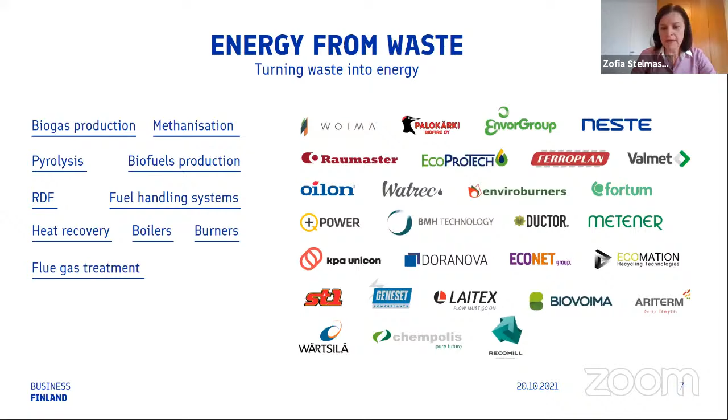There are heat recovery, boilers and burners solutions, quite a holistic approach to these. We will hear from companies like Valmet, Woima, and Sumitomo Foster Wheeler today a little bit more. And then some waste management design and consulting services, and waste efficiency in industrial process services. Please study more and approach us with questions if this is of interest.

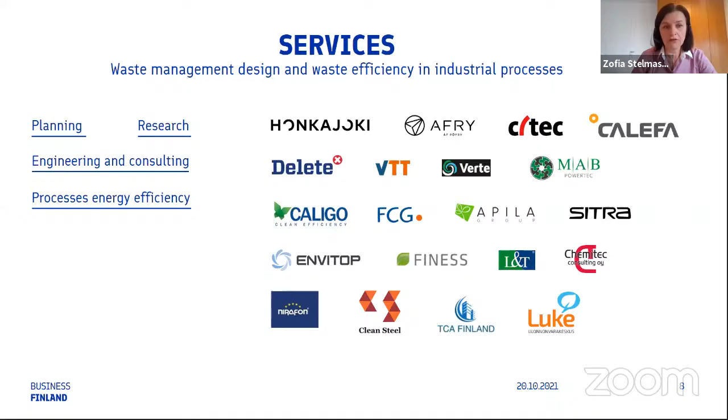Now I would like to move to some best practices and cases from Finland. I have selected 3 for you to bring forward. The first one is ECO3 - and what is ECO3? ECO3 is an industrial eco park.

This is an area of about 120 hectares near the city of Nokia and Tampere. What they aim at, their goal, is to actually turn all the waste into circular economy - so waste is no longer waste, it is raw material for somebody else. And then landfills in that landscape are no longer needed. This is a kind of competence center for demonstration and piloting. They started about 3 years ago, and this still continues, so new companies are coming and testing their solutions there.

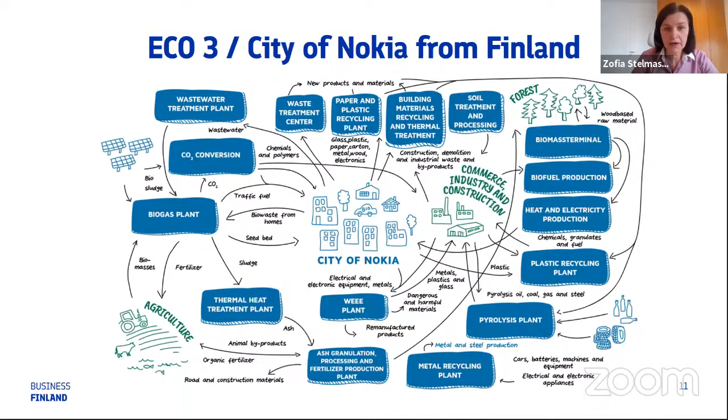My next example is about Vantaa and its waste-to-energy as an element in decarbonization. Basically, Vantaa Energy is an electricity and heat producing company in the city of Vantaa. They have an ambitious target of going carbon neutral by 2030.

What they need to do in order to reach this is, first of all, phase out coal, and this will happen already next year. One of the enablers for this is the completion and expansion of its innovative waste-to-energy plant.

Last year, they actually started to develop the concept with the company Wärtsilä about how to produce synthetic methane there, and then how it could be further used.

They intend to use green electricity to produce hydrogen through electrolysis. Then they intend to extract CO2 from the emissions of the existing waste-to-energy plant, and out of this produce synthetic methane.

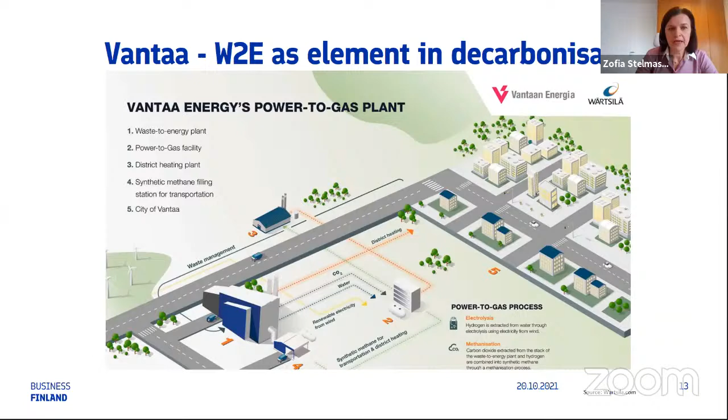I'm running out of time, so very shortly, the Lahti case. Lahti is a city in Finland, about 2 hours' drive from Helsinki. In 2021, it was the European Green Capital, and they have plenty of very interesting climate-positive initiatives.

What I would like to bring here is waste management again, and how this is part of the puzzle. If you look at the picture on the left-hand side, in 2007 they used to landfill about 55% of the waste collected. Now in 2021, they are landfilling about 1%, and all the rest is either recycled as material or utilized for energy purposes.

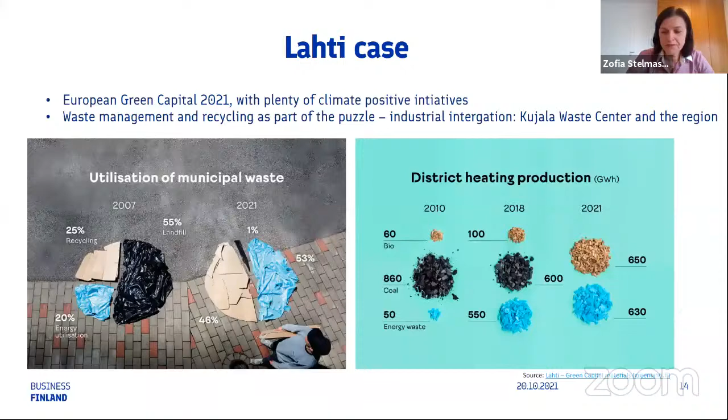This is a tremendous path forward. How was it possible? It is because they were stubborn and went step by step through different developments. For example, they started separate bio-waste collection in 1995. In 1998, they started extensive separation at the source with five waste types.

Then in 2005, composting was brought into being. Then in 2014, biogas, and so on and so forth. Really impressive.

Now, if you would be interested to hear more about these cases, I would like to encourage you to approach us, to approach our colleagues in Turkey, the excellent Turkish teams in Business Finland. And with these words, inviting you to cooperation, I would like to end my presentation. Thank you very much for your attention.

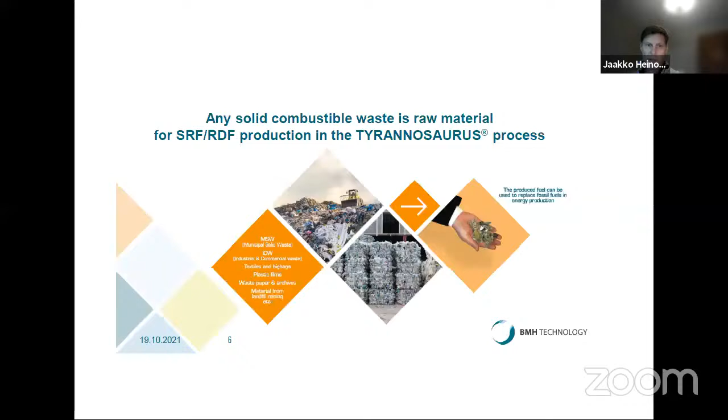I'm telling a little bit about the waste refining solution. Next, please. This is the main idea. There is a lot of waste around the world, in the landfills and everywhere, and we can make very good quality fuel from that waste. And with this fuel, it's possible to replace fossil fuels in energy production. Next, please.

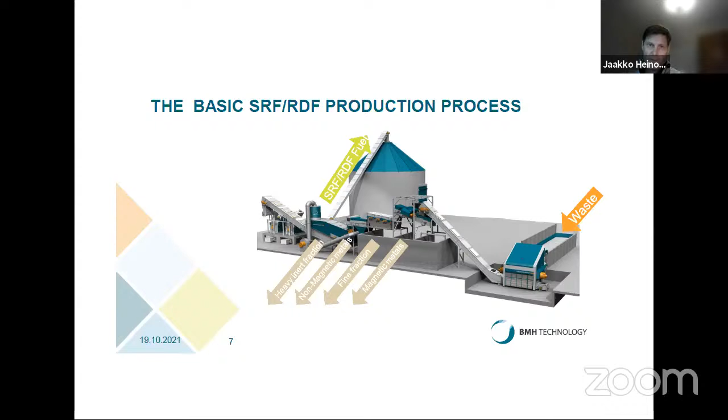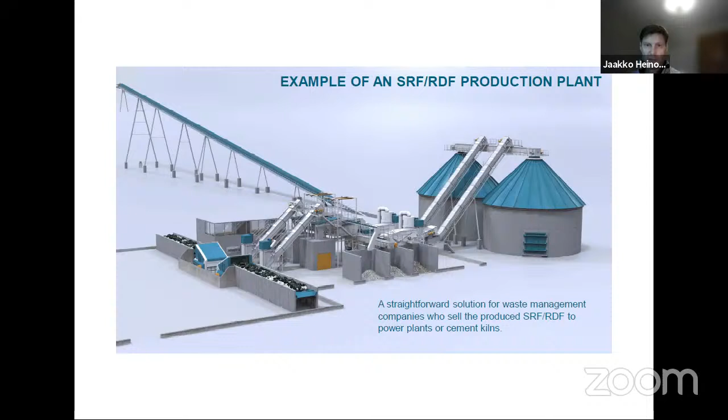Next, please. And then about the solid biofuel handling solutions. Next, please. This is a typical layout from solid fuel handling process. In the beginning, there is a fuel receiving station, and then we have screening station and storage, which can be A-frame storage or silo type of storage. And from this storage, we can feed straight fuel to the boiler.

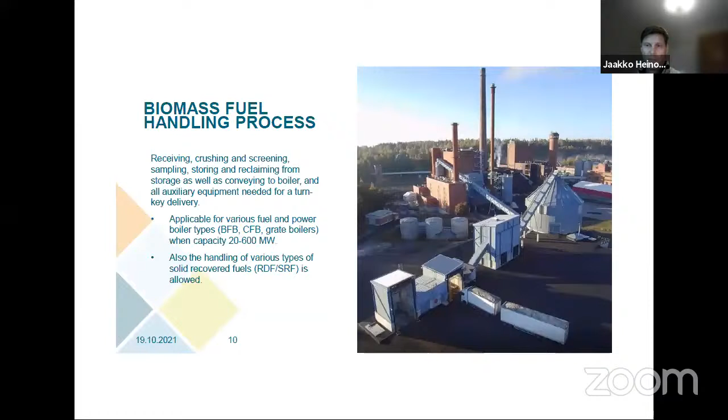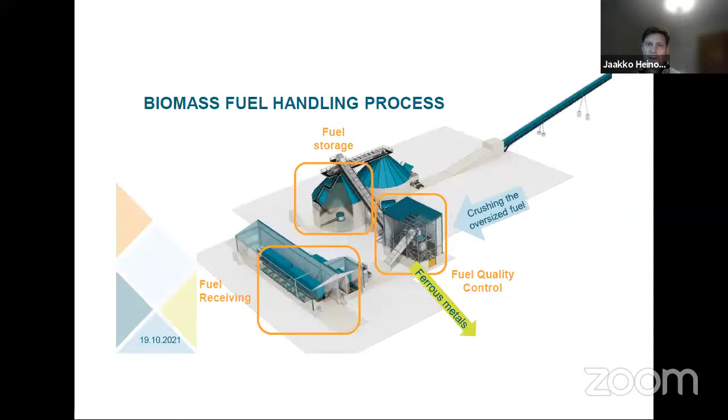Next, please. This is another picture also from the same thing. So in the beginning, we have fuel receiving, and then we have fuel quality control, where we can take out ferrous metals and crushing the oversized particles. And finally, we have fuel storages and feeding to the boiler and or cement plant. Next, please.

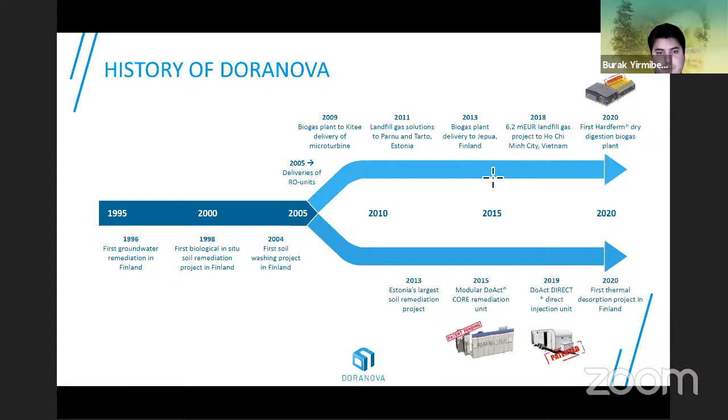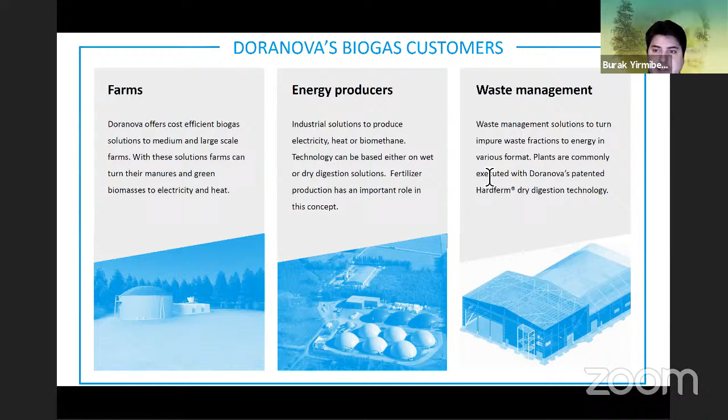So, as most of you might know, biogas has three main customers. Number one is farms, second is energy producers, and the third one is waste management. And this is the one I would like to focus on, because waste management is the primary goal of biogas production. It is not the energy, but mostly the waste management solution. And Doranova patented a new solution for cases where the current solutions cannot produce results. So we have three different plant concepts.

The first one is Wetferm, which is more like a classical approach, that is wet anaerobic reactors, where the substrates, the waste, is in mixable form, which has lower solid ratio. Then we have the Solidferm, where it has up to 25% dry matter, a little bit more challenging, that needs a different approach. And then in the last part, we have the Hardferm, which is our patented solution, where the waste has so much solid matter and impurities, large particle size, that it is not possible to process with the classical methods.

And this is especially designed for organic fraction of the municipal solid waste, which is a big case in Turkey, where the waste separation is not done at the source, in the homes, but it's done in plants where one single truck brings all the waste to the same location and it is separated by hand or by automatic solutions. But the separation for the organic fraction is generally not enough to process them in regular biogas plants.

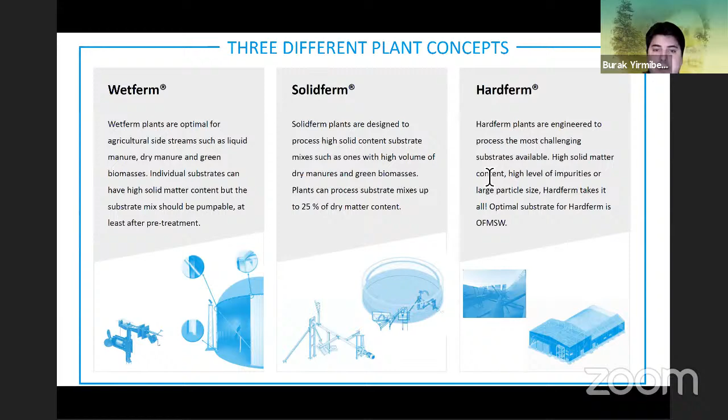So for Wetferm and Solidferm, I will not go into detail. These are pretty classical solutions, but I would like to mention one thing, that in Finland and the rest of the world, one developing trend for biogas production is not electricity production. It's actually being fuel. So what we do is we purify the biomethane up to 99% purification, which can be used as fuel, or it can be pumped into the existing natural gas systems.

And that's why in Finland, if you look around the municipalities, a lot of municipalities are using biogas as their bus and truck fuel. And also there are applications where they are mixing it with ship fuels, the natural gas fuels in the ships, to have renewable methane in the system.

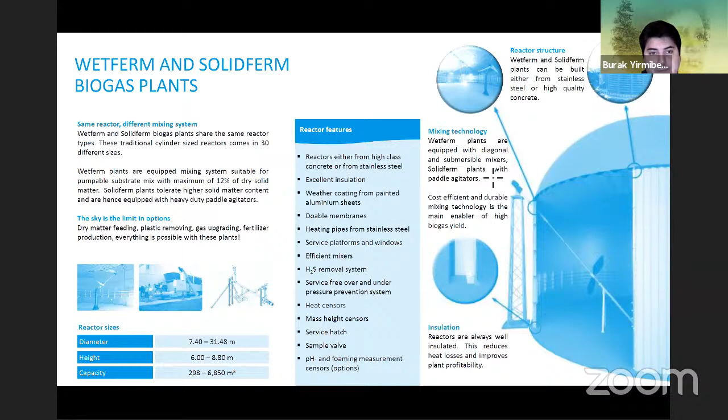And when it comes to Hardferm, we developed this most efficient organic fraction of municipal solid waste for biogas production. And this is a completely scalable concept. It can be as low as 10,000 tons per year to 160,000 tons per year, depending on your needs. And it has been engineered to focus on stability and mechanical durability.

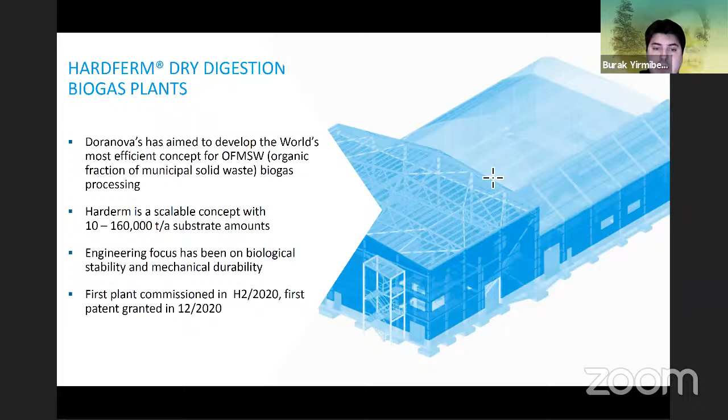The problem that the other solutions have is, after a while, the process stops because of either biological instability due to impurities or problems with the mechanical mixing. And we have our first plant that started operations last year, and we got our patent granted in December last year. And we have other Hardferm plants in production right now.

So when should we use Hardferm? It is when you have high dry content, when the liquid amount is very low, and you have a lot of impurities. It can be sand, rocks, or plastics, or whatever that's not biomatter in the system.

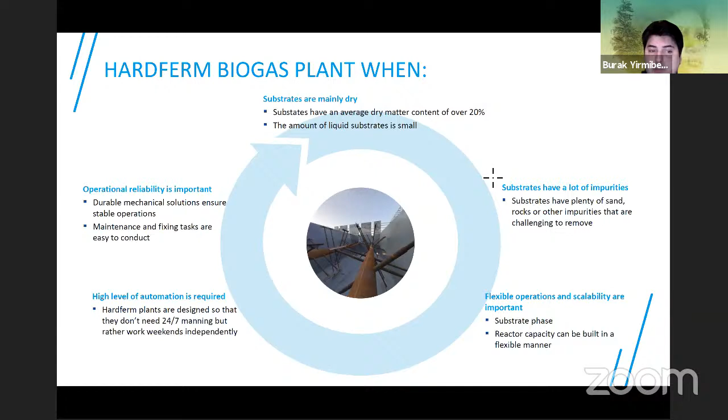And it is very flexible, and reactor capacity can be built in a flexible scale. So today you might need 30,000 tons per year, and in 5 years you can increase it to 100,000 tons without a problem. And we try to make it as automated as possible. And our solution ensures stable operations, and maintenance and fixing tasks are easily conducted.

And in here you can see the concept of the Hardferm. And if you know a little bit about biogas plants, you might consider this a very unique way of mixing. And the way we do it is we heat the walls, floor, and also the circulation shaft. So the heat efficiency is covered in all ways, and the mixing is completely optimal and optimized to deal with this kind of challenging task.

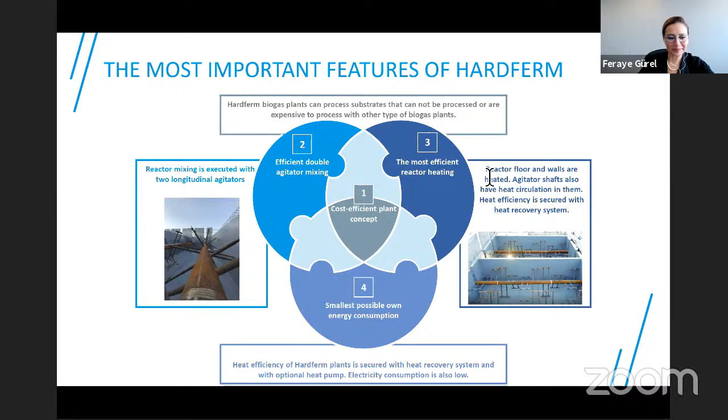Last 2 minutes. Yeah, and as a last point, what I want to mention is this is a very important concept for Turkey, where we don't have, unfortunately, source separation. And the organic fraction of our waste is generally going to incineration, which is less than 10% efficient compared to biogas production.

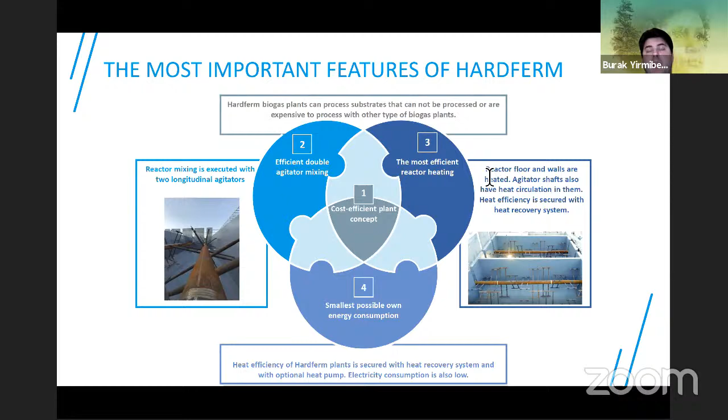So this is going to be the future, and in the future, what we are expecting is biogas production will offer a way to capture CO2 from the atmosphere and, together with hydrogen, convert it to methane. This has already been discussed, so I will not go into detail.

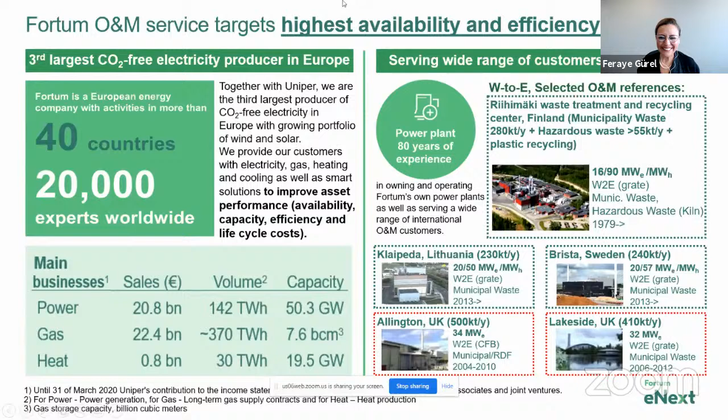Are you with us? Okay. Yes. Okay. I'm with you, and I can see myself on your screen. Okay, that's very nice. So it's good that I look slim. I'm happy to see myself. Screen is yours, Mr. Holappa. I can't really say is it any better now, but let's say, is it any different now? So now, hopefully you can see the slide. We can see it. Okay.

So anyhow, good morning to everybody. My name is Jyrki Holappa, and I'm from Fortum, and I'm representing specifically a business unit in Fortum which is providing services and solutions both to our internal business units and divisions, but then also to companies external to Fortum.

So basically, I'm now focusing on operation and maintenance service, as our agenda today is quite much on the waste to energy side, and here highlighting what we typically focus on in O&M: highest availability and efficiency to owners, irrespective of whether we are talking about Fortum or other owners of the power plants.

On the left-hand side of this very busy slide, I'm describing Fortum in general, because it's very important to understand that our solutions and services are always based on our own assets and experiences, and basically we are not offering anything to anybody unless we have tested and proved it ourselves with our own fleet.

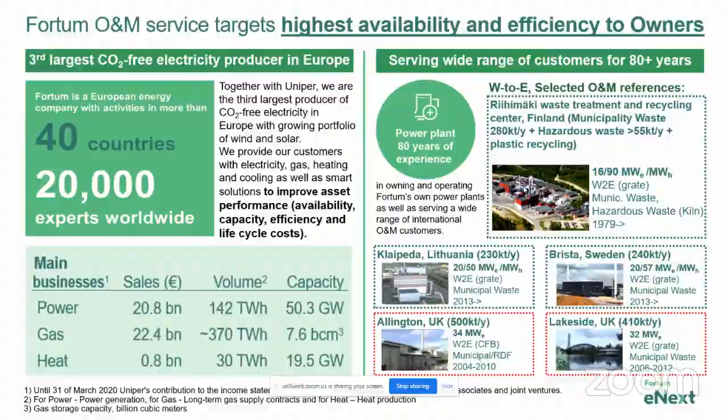That's about the generic part, and the only thing I still have planned to go through with you today is the operation and maintenance of waste-to-energy type plants. The first thing is always, of course, to understand what kind of technology, what kind of plant we are talking about. And with waste-to-energy plants, we all know that there are many challenges. Technically, we are talking about a challenging fuel type of power plant, and it really differs from case to case where the biggest importance lies regarding operations.

Typically, waste-to-energy plants have, of course, high priority to deal with the waste, so it's a waste management topic, but electricity production and the efficiency of making electricity out of the waste is sometimes very, very important too. It really varies from case to case, but it's very important that this is properly understood when operating and maintaining the plant.

Then again regarding O&M, when there are many stakeholders involved in this kind of project, it's very important to understand how the risks are diversified among different stakeholders in the project so that it really is functional, makes sense, and is properly balanced. Otherwise, it tends to lead to problems if that's not done properly.

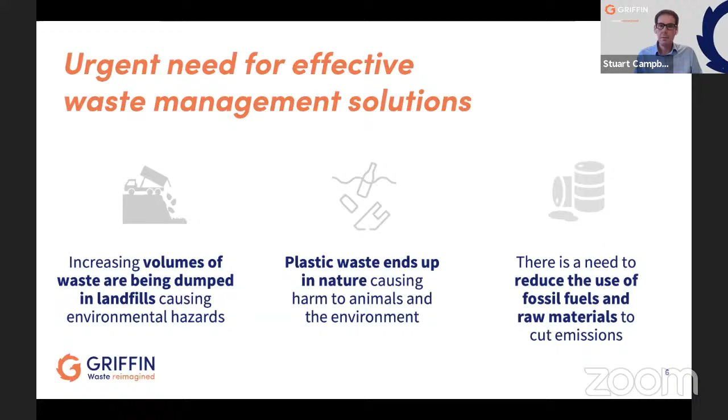We all know about this, the need for effective waste management solutions, and exactly the reason that we're all on the presentation today. We really need to drive forward in reducing landfill, reducing plastic waste and reducing fossil fuel usage. And that's what Griffin solutions are all about.

The Griffin way of thinking: we're a project developer. I'll talk about the projects that we're developing there. We also invest in projects where necessary, and we operate plants as well. We're operating the RDF plant out there in the United Arab Emirates. We work with equipment suppliers to supply best-in-class equipment, and we've got our finger on the pulse in terms of the materials and the trading of those materials.

So the 3 business units, I'll just very briefly explain what we do there now. So fuel from waste, focused on refuse-derived fuel particularly. We've got our first plant operational. That went operational 12 months ago in the United Arab Emirates. It's a build, own, operate, transfer project with the government of the UAE and Ministry of Climate Change and Environment.

We've got local partners there, so Griffin is one of 3 partners in the projects. Investment size of 33 million euros, and it's the first refuse-derived fuel plant operating in the Gulf region. And really, that's dealing with over 1,000 tons of municipal solid waste a day, and creating an RDF fuel.

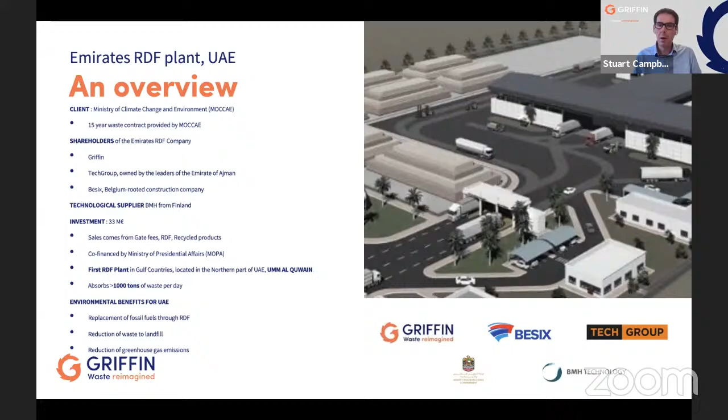Plastics recycling, the second part of our business. We run the Business Finland ecosystem around plastic waste refining. So we're bringing together over 30 companies, and that ecosystem is growing, and we're trying to develop co-learning and co-opportunities for project development.

And then we've also just launched a joint venture in Finland around extended producer responsibility. So you probably know about this. This is EU legislation that's driving up the waste directives, driving up the requirement for recycling targets. So along with a joint venture partner there, Reclay Group from Germany, we've launched an extended producer responsibility company that will be really taking care of recycling as we go forward in Finland.

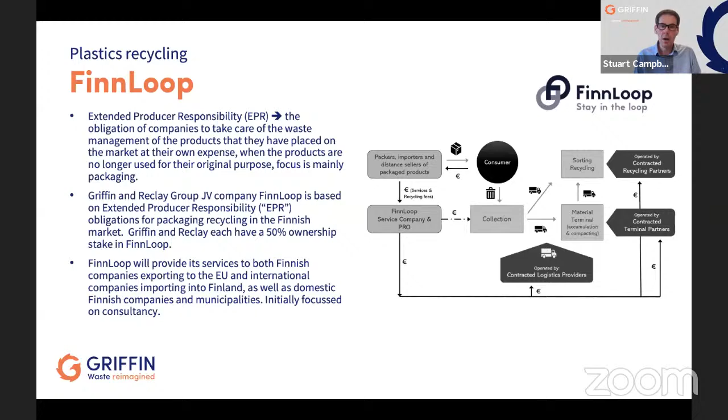We're providing consultancy services about improving packaging design, and taking care of packaging recycling, particularly around plastics as we go forward. And the next stage for that, we'll be launching a producer responsibility organisation. That could be very useful intelligence and knowledge that we've got in this sector that we could apply to the Turkish market as well.

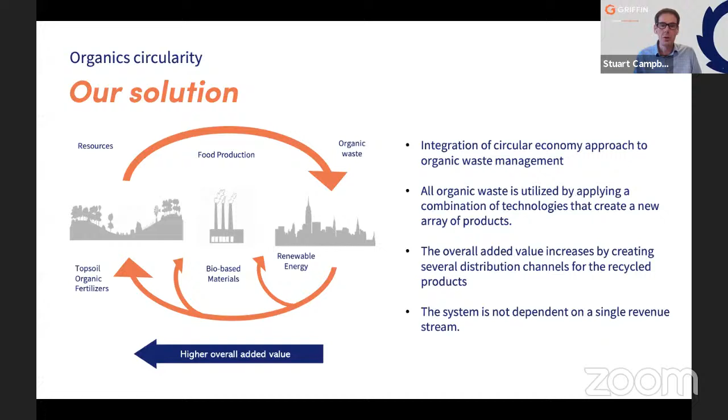And then the final part of our business is around organic circularity. So that's composting, particularly. It's all around making sure we capture the benefits of green waste and organic waste. And we've got our own technology here. It's a high efficiency, high speed composting drum that can basically circulate the goodness of that material back into the agricultural sector, as explained on this slide that you can all see.

We're deploying our first, thank you. We're deploying our first units here initially in the Italian markets and the Spanish markets. And again, I'm sure this will be very applicable to Turkey, but it's basically composting that material so it meets the high levels of EU standards and producing a high quality organic compost.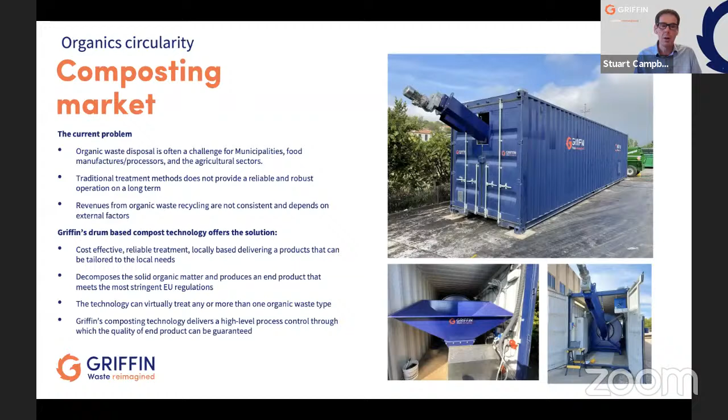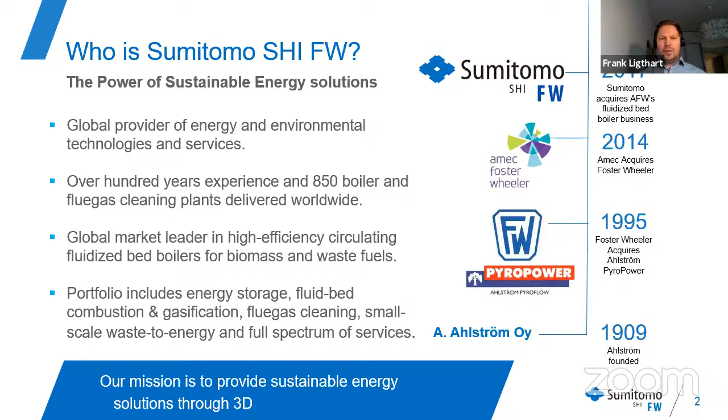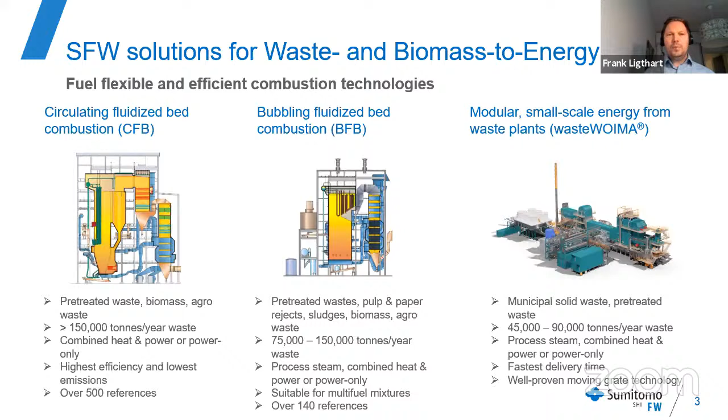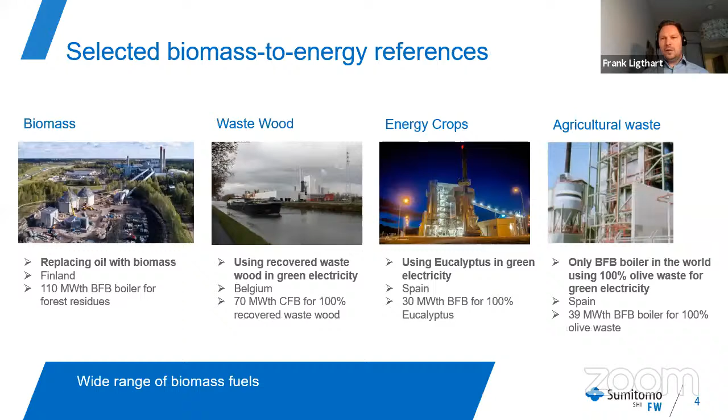Just to give you a flavor of where SFW boilers are utilized, 4 selected biomass to energy references. I will not go through them in detail, but on the left, you see a typical biomass application, a BFB boiler for using forestry residues in Finland. Then going to the right, a CFB boiler in Belgium, utilizing recovered waste wood in green electricity production. The next one is an example of using energy crops in electricity production using an SFW BFB designed for 100% eucalyptus wood chips. And as a last example, a unit in Spain, designed for 100% olive waste for green electricity production. So clearly the SFW boiler value proposition is suitable for a very wide range of biomass fuels.

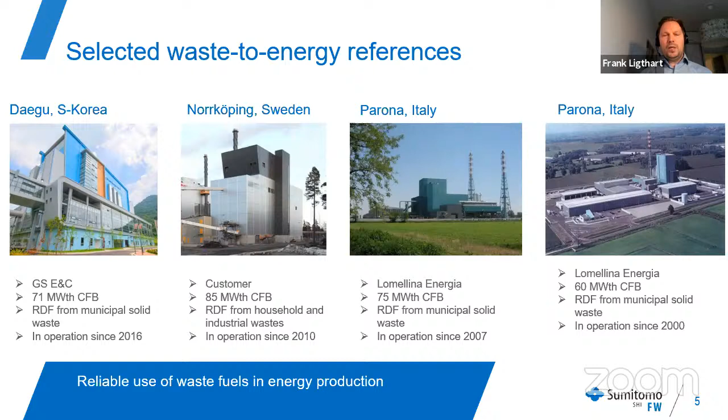Similarly, a few selected examples of waste to energy plants built by SFW. The 4 plants I've selected here are all based on our circulating fluidized bed combustion technology for very high efficiency conversion of waste into energy. All these plants are utilizing a fuel which is derived from waste, what we call a refuse derived fuel, a pre-treated waste for energy production.

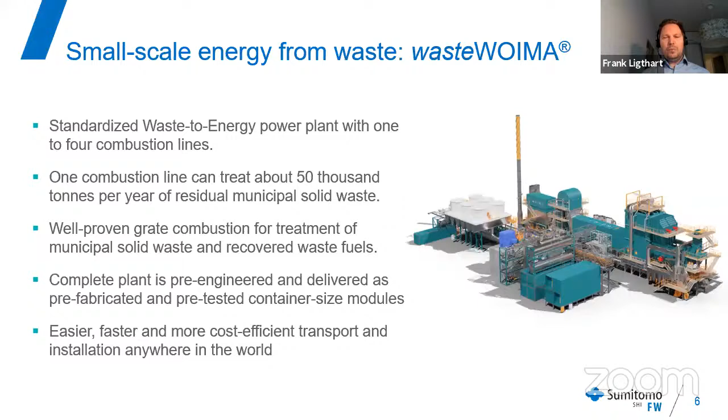Good morning, everyone. My name is Ari Kokko and I'm coming from Valmet Energy Business Unit. I'm heading the technology and R&D here. Today I'm presenting Valmet's high efficiency waste to energy solutions.

A couple of words about Valmet first. We are a technology provider, but of course equipment supplier as well, in the pulp, paper and energy business segments. We are a global company having headquarters in Espoo. Size-wise, we have 14,000 employees and we are roughly a 3.5 billion company. We also, like we have heard today, have a long history as a technology company, more than 200 years.

Talking about waste to energy, we are never talking about waste incineration. We are always talking about waste to energy or waste to power. So we are following this circular economy principle, meaning that all the materials which can be recycled are recycled and not put into the boiler.

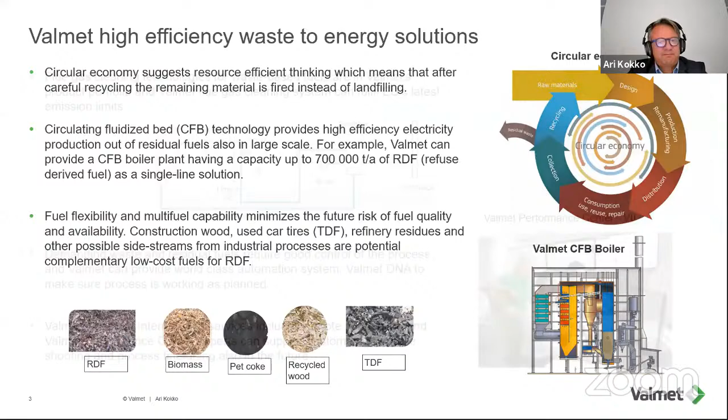Then, Valmet's waste-to-energy package also includes a full flue gas cleaning system. We have in-house equipment for flue gas cleaning, and those are Valmet's own design and Valmet's own delivery. We can fulfill all the flue gas emission limits anywhere in the globe.

Everybody knows that waste is quite a demanding fuel. It's very heterogeneous, so the quality is changing. So controlling the system is very important.

Luckily, Valmet has its own automation system, Valmet DNA. So we have very sophisticated controls to provide, and we want that to be part of our package.

The last element, built on this Valmet DNA automation system, is the Valmet Industrial Internet. Because the system has remote connections, we can provide the connection to our Valmet Performance Center for our customers, not only for startup purposes, but also later on to fine-tune the system or do some troubleshooting.

This has been very valuable during this COVID time when traveling has not been too easy. We have managed to start up boilers and also solve some customer challenges.

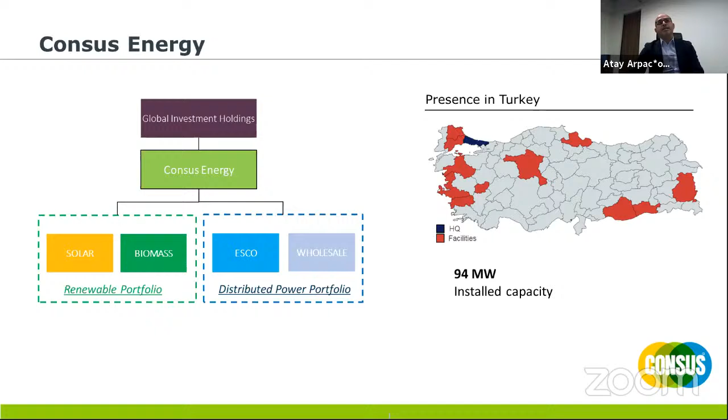In distributed power, we own the largest ESCO energy service company in Turkey, providing build and operate cogeneration and trigeneration facilities for end consumers. Our total installed capacity under management is around 94 megawatts. And our operations are distributed throughout the country, from west to east, from north to south. I will leave you with some pictures of our facilities while I speak in more detail about our operations.

We're using conventional moving grate boiler technology with a steam turbine. So probably everybody knows about that. But I think our differentiating factor is that we focused on using mostly local equipment, supporting local manufacturers where we could do that. I think one other differentiating factor is that we collect a substantial portion of our biomass with our own equipment and with our own personnel.

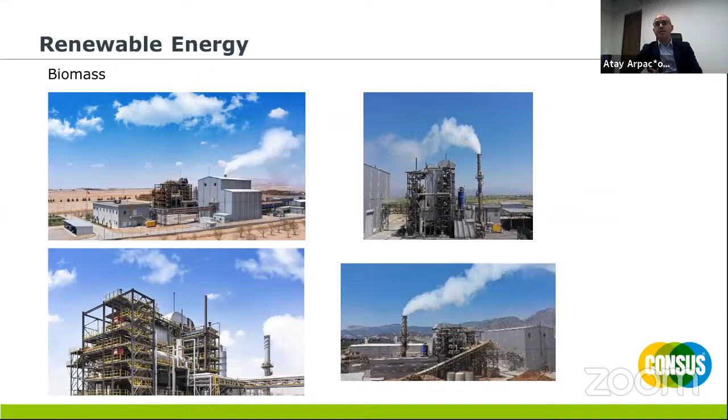I think we have the largest agricultural equipment fleet in Turkey, or if not one of the largest, including combines, rakes, balers, and all kinds of equipment that is required to collect these stalks from the farmers' areas. And of course, the biggest challenge about biomass is seasonality. The harvest season is 60 days, 90 days tops, and you have to collect a year's supply within that limited time frame. So it creates a big bottleneck. So you have to plan very carefully.

So we are using our own equipment and our personnel, in addition to a comprehensive procurement and supply using our solution partners and suppliers. We have agreements with private farms, state institutions, including the Forestry Directorate, the Agricultural Directorate of Turkey, in order to create a long-term supply security for our plants.

Of course, biomass is still a niche sector in Turkey, but a developing sector. I think one of the most important things is that besides the environmental and economic values, the employment, we have to talk about it. Per megawatt installed capacity, biomass has the highest employment rates. Also considering the employment that it creates on the supply side, it's significant, and it creates significant support also regionally.

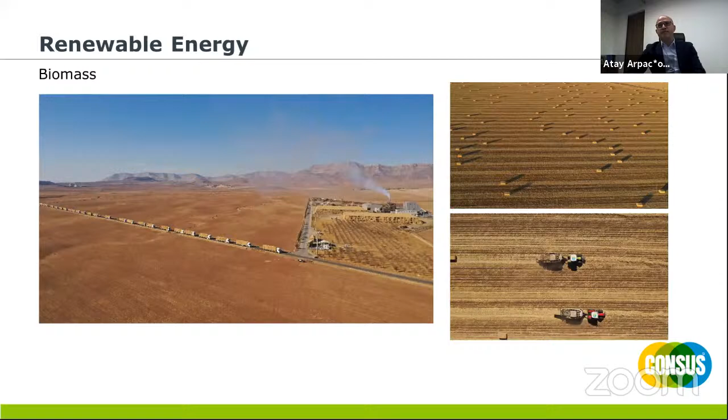I think the integrated approach to collect, to handle, and to operate the plants is required in the biomass sector. I think that was our strategy while entering this sector, and I think we have managed to create a supply chain that will create long-term visibility for our operations.

Last but not least, I also want to mention our distributed power portfolio, because we have the largest energy service company in our portfolio with 54 megawatts in 8 locations. We are building and operating cogeneration facilities and trigeneration facilities for our end consumers, providing their electricity, heat, and cooling. But we are also reviewing some opportunities where this ESCO plan strategy can be applied using the waste.

A lot of manufacturers, a lot of factories produce waste, and somehow try to dispose of that waste. If a build and operate model can be applied using waste to energy technologies in these factories, I think there can be significant potential for Turkey, aside from the IPPs, I mean independent power producers, so that the factories can produce their own electricity and heat for their manufacturing purposes. This can be a significant opportunity for Turkey as well.

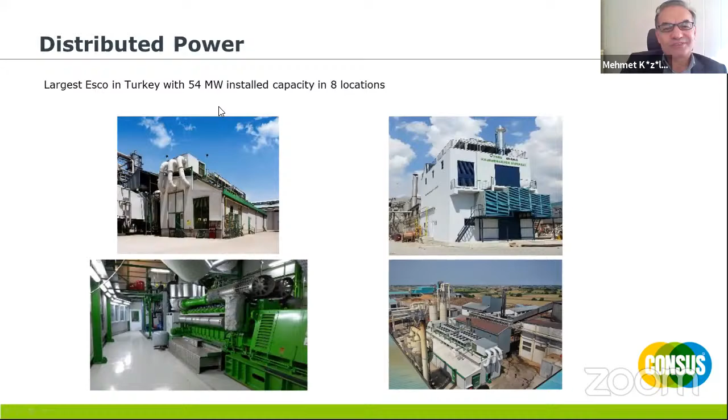I am representing Çimentaş Trakya cement plant, which is located in Edirne, Turkey. Çimentaş is a subsidiary of Cementir Group, which is an Italian group. The plant capacity is 2 million tons of cement per year. I want to give these rough figures to understand the capacity. The cement industry, as you all know, is an energy intensive sector. So what does energy intensive mean?

I can give you roughly the variable cost structure. 85% of the variable cost consists of energy. Only about 15% consists of raw materials. Of that 85%, roughly 50% is heat energy, and about 35% is electrical energy. So we are concentrated on the heat energy. As of today, 55% of the heat energy is replaced by alternative fuel.

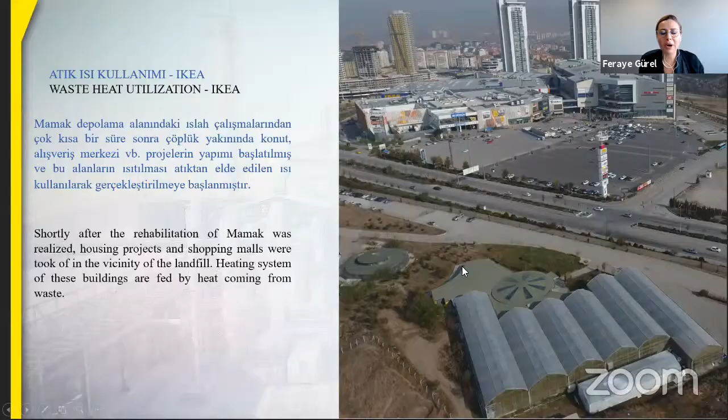Morning, everyone. Again, I'm Ozan Öztürker. I'm the R&D Director of ITC. ITC is the waste management company, I think the first company doing this business in a professional and modern way in Turkey. For more than 20 years we have been doing this business in Turkey. At the moment we are operating 14 plants in 11 different cities with 1,400 employees.

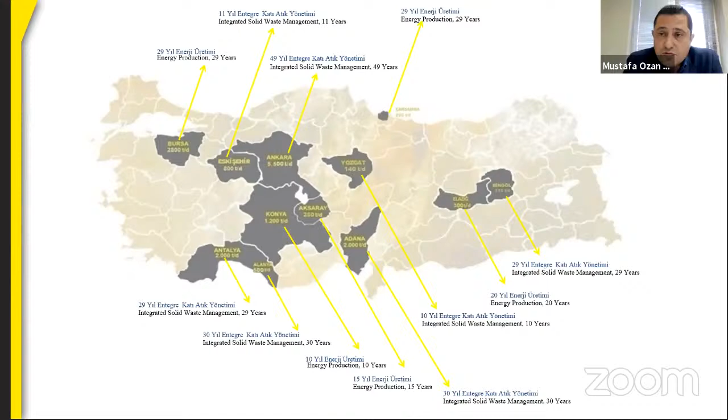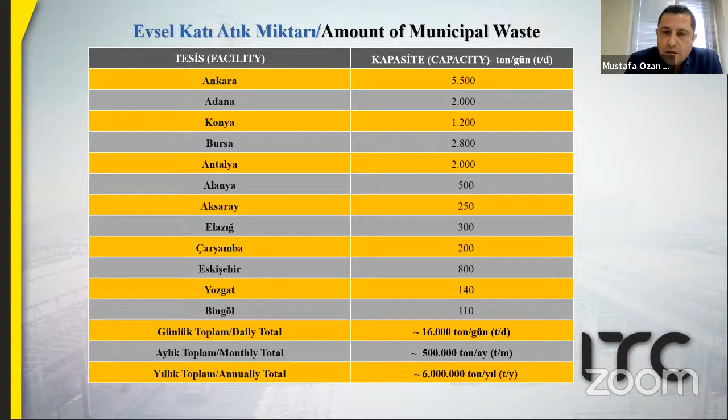Approximately, I can say that we treat every day 30% of the whole of Turkey's household waste. And you can see the capacity of our plants. Unfortunately, in Turkey, household waste is not source separated. So we have to deal with a very challenging and difficult waste here, and we have to adapt and find proper solutions for such a waste. At the end of the day, we can now generate electricity, we can do recycling, we can do RDF production and also waste heat management.

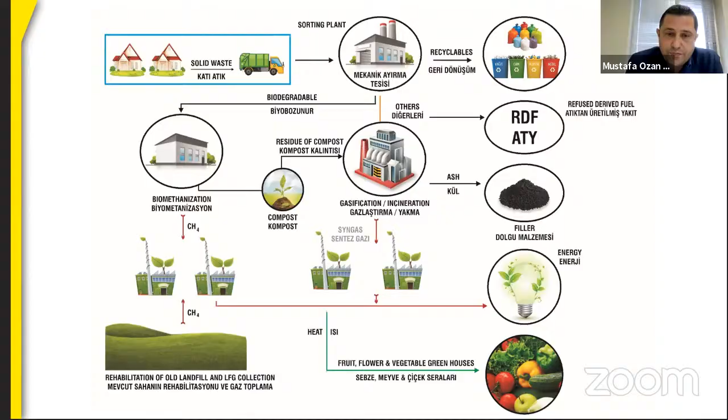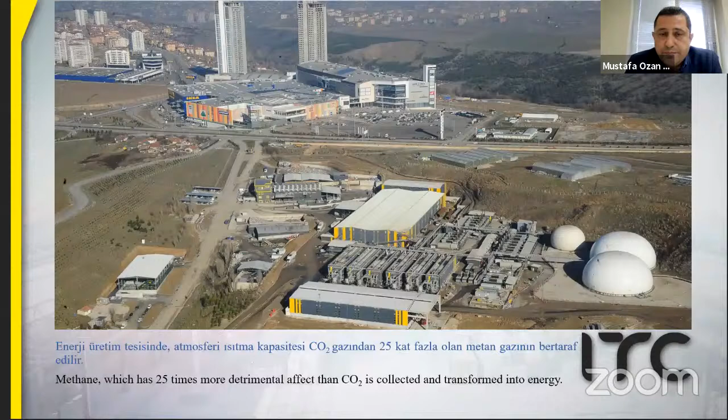But first of all, our first priority is the rehabilitation of the landfill, because in each project, at first we have something like a wild landfill. This photo is from Mamak, our first project, in the capital city of Ankara, and it turned out to be such a plant at the end of the day. This is the landfill site of Mamak, and we are now surrounded by shopping malls and residential buildings. This is another view of Mamak, and this is Adana city. It's the same story here also.

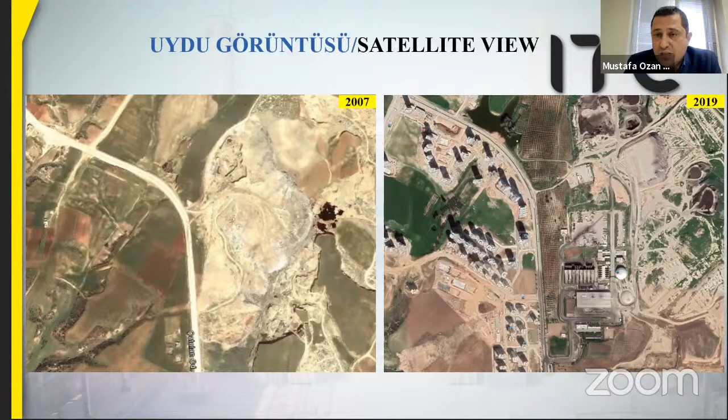This is how it started and it turned out to be such a plant at the end of the day. This is the satellite view. During the startup phase, there was nothing but landfill. Now it's a residential area. As I mentioned, we have 14 plants. We consider 6 of them as integrated solid waste plants, meaning in these 6 plants we have sorting units and biomethanization. Our digesters are concrete, plug flow digesters. We call it biomethanization and landfill operation.

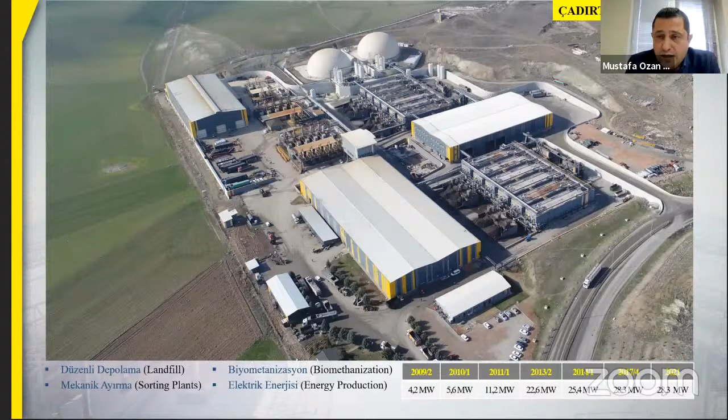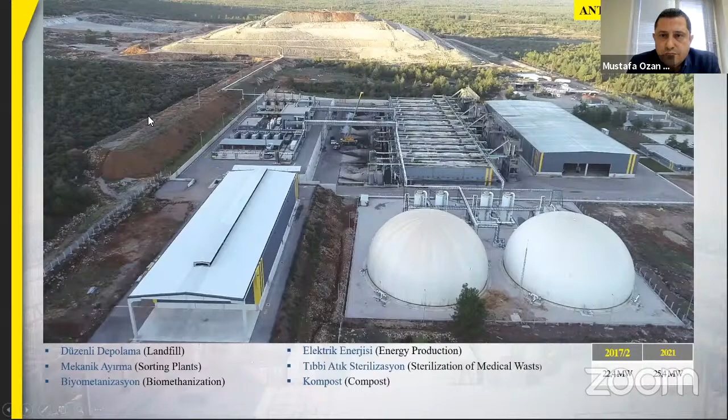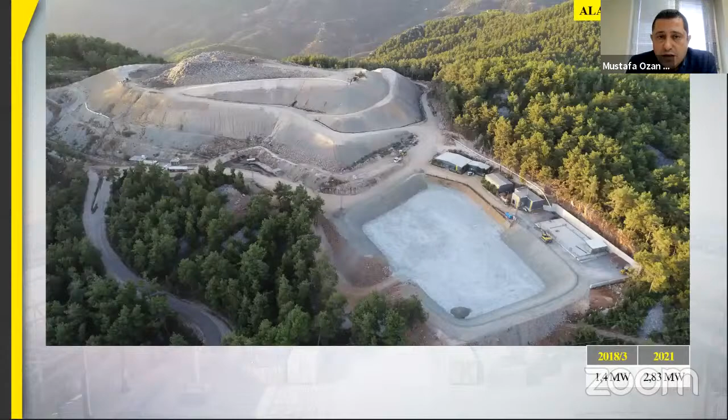We have 2 plants in Ankara. This is the Sincan plant; you may see the electricity production capacity also. This is the Mamak plant, the other plant in Ankara. This is the Antalya plant. This is the Adana plant. This is the Eskişehir plant. Trying to be fast: Yozgat plant and Alanya plant, also in Antalya. The other 8 are only electricity production from landfill. This is not our preference; it depends on the tender specification. So in these 8 plants, we only produce from landfill gas: Bursa, Konya, Elazığ, Alanya, Bingöl, Çarşamba, and Aksaray. Overall, we have a capacity of about 125 megawatts.

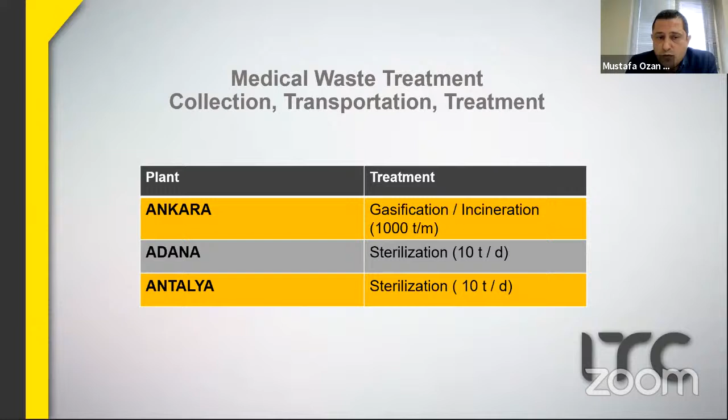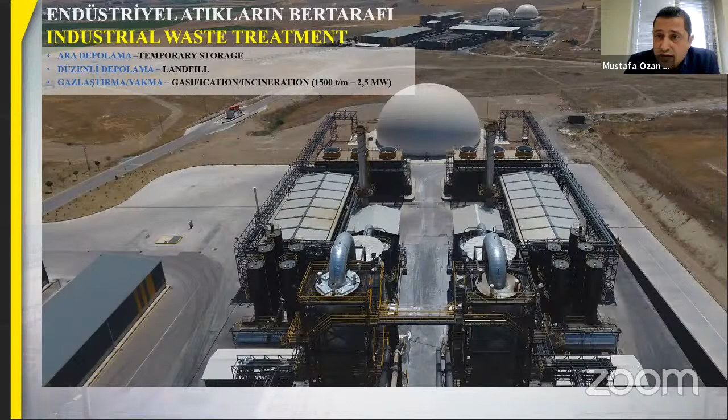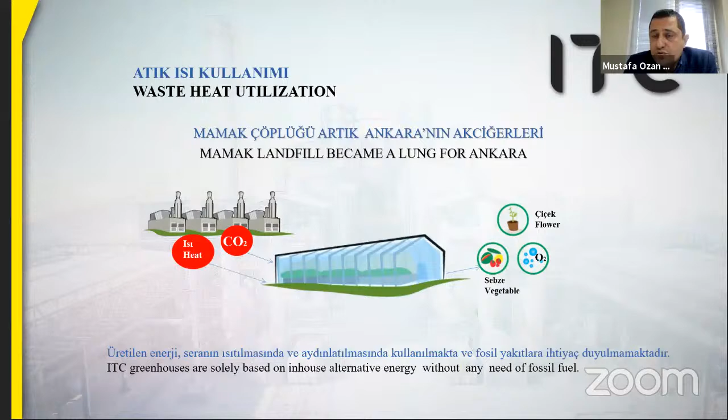Besides household waste, we also deal with medical waste treatment in 3 cities: Ankara, Adana and Antalya. In Ankara, we have an incineration plant where we incinerate medical waste. In Adana and Antalya, we have sterilization units. In Ankara we also incinerate industrial and hazardous waste. We also have a packaging waste management system, just going fast. And we also use waste heat utilization systems.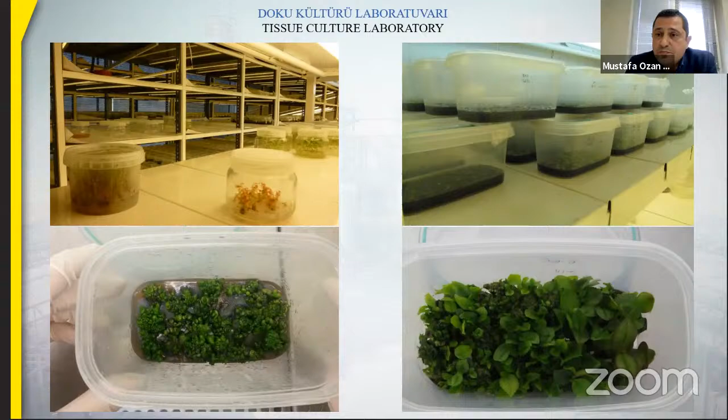We have greenhouses. You may see some of our products, going fast, to be on time. And in Ankara, we also have a tissue laboratory, which is integrated with a very modern greenhouse. We can produce several plants here, but our main concentration is potato, because after the tissue laboratory, we produce potato in our greenhouse.

So we do also sell our waste to IKEA in Ankara, in Mamak plant. As R&D, these are our new projects, new investments to be done within this year and next year. We are planning these investments. And also, as R&D, I'm mainly focusing nowadays on greenhouse, vertical farming, plastic granulation. This is also one of our topics.

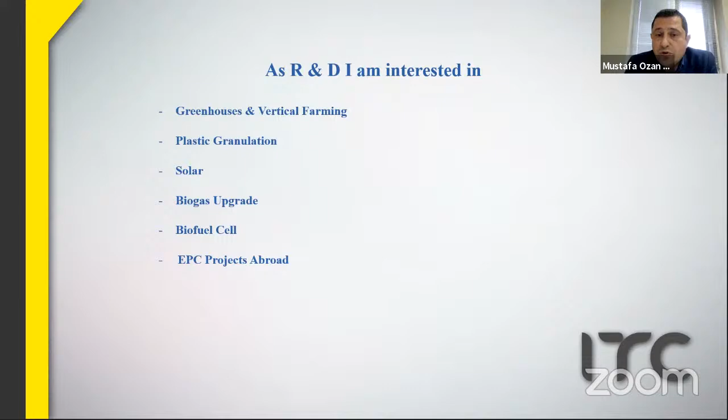Solar systems, biogas upgrading, biofuel cells, and we have a new company in Austria to follow up some EPC projects around the world for similar waste of ours. Thank you for your time.

Mustafa Bey, thank you very much. Actually, before ending the session, there is one question for you. If you have time, I want to ask the question to you. First of all, I want to ask it in Turkish.